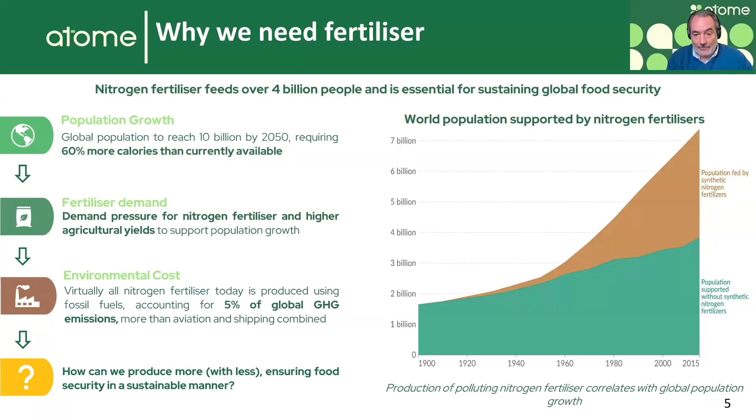The opportunity and impact of fertilizer means that if you can tackle the carbon footprint of fertilizer, you can take care of 50% of the carbon footprint of bread, 20% of barley, 20% of milk. If I look at this can of Pepsi, 5% of that can's carbon footprint is directly correlated to the use of fertilizer. So it's a super low-hanging fruit, extremely controllable.

But the problem is we need tons and tons, thousands of tons of fertilizer a year. The way to make green fertilizer and green calcium ammonium nitrate is by going to green ammonia. The only difference between green ammonia and regular ammonia is that the hydrogen used as the base molecule comes from renewable sources. The only way to do it at large scale is if you take a lot of baseload renewable power and put it into the existing processes, which is what we are doing.

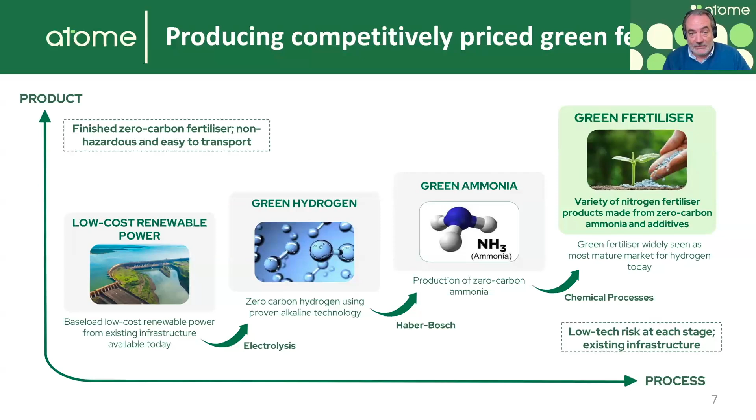In our first project, which is in Paraguay—why Paraguay? Because that's where you have the second largest hydroelectric dam in the world, and you're in the middle of the largest fertilizer import market. Think about Brazil, Paraguay, Argentina—the main breadbasket of the world today. And yet it imports 95% of its fertilizer from Russia, Saudi, and the US. So you can do decentralized fertilizer at scale with the right environment.

You'll hear later the great stories of others who can do things decentralized in a different technological way. Our view is we don't take technology risk—we take existing technologies, but we do them at a very large scale and develop them. Our first fertilizer is really about going calcium ammonium nitrate, displacing urea with specialty fertilizers.

Villeta is our first project, and I should say, we are a publicly listed company, traded on the London Stock Exchange. Because of that, a lot of what I say now is available in much more detail on our website at atomeplc.com, where you'll see a much longer presentation than here.

In this slide is basically our first project: 145 megawatts of power, which will feed a plant that will produce about 260,000 tons of calcium ammonium nitrate per year. We're talking about displacing every single year basically half a million tons of CO2 per year. So it's not nothing—it's not huge, but it's not nothing.

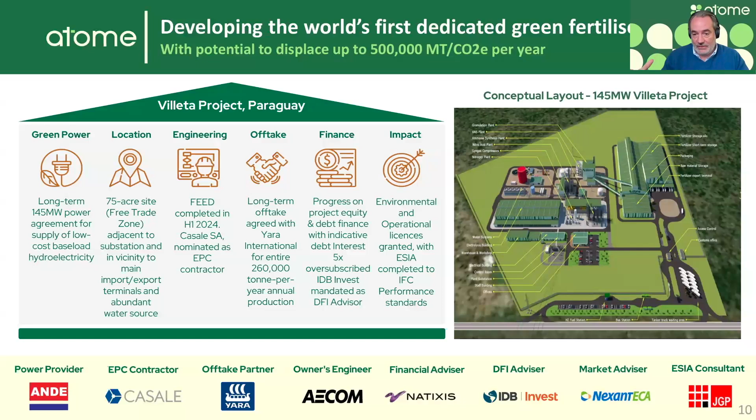So you need to manage communities, you need to manage the environments and so on. This gives you an idea of what it means: 145 megawatts of power, which will produce about 260,000 tons of fertilizer, displacing twice the amount of carbon.

According to our broker, for a publicly focused company, there's the potential to make about $110 million in year one of revenue, while giving a 90% reduction of regular synthetic fertilizers, at the same price as imported gray fertilizers. We want to get the green premium, but you need to be competing without the need of a green premium and without the need of a carbon premium.

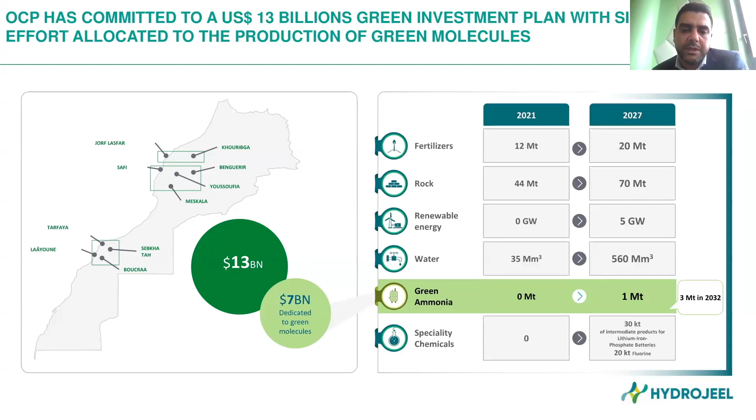Maybe on the next slide, a zoom on hydrogen, we can skip this one please. Our two main projects that we are contemplating today: a project of 100,000 tons per year of green ammonia directly located in the heart of the chemical operations of OCP, in Jorf Lasfar. This 100 kilotons will be 100% taken by OCP and will support the decarbonization of part of those operations, but it also serves as an industrial and development platform for the large-scale ambition of multiple million tons of green ammonia being developed in the south of Morocco.

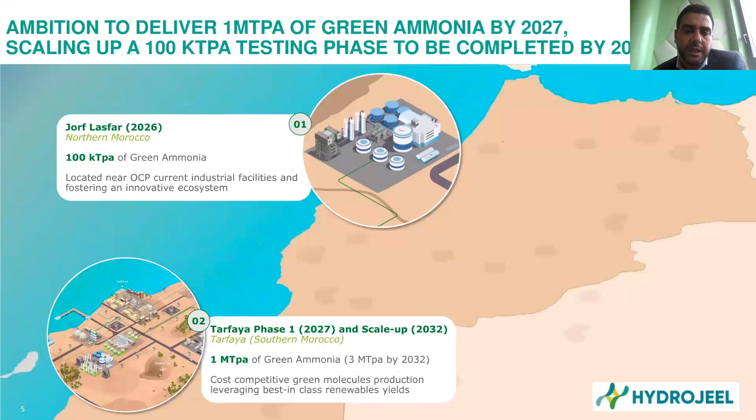On the next slide, there are more details about the projects. For Jorf, it's a project that will be 100% sourced from the grid, from new renewable projects coming online. It's really a cornerstone of our full strategy for developing green ammonia, because it helps test emerging technologies that are promising for scaling up operations. It also helps integrate hydrogen, ammonia, and the management of intermittency, and by design it's compliant with the stringent requirements for RFNBO certification for hydrogen.

It's uptaken by OCP, and the project financing is also supported by OCP, so that we can expedite the key learnings we want to leverage from this project.

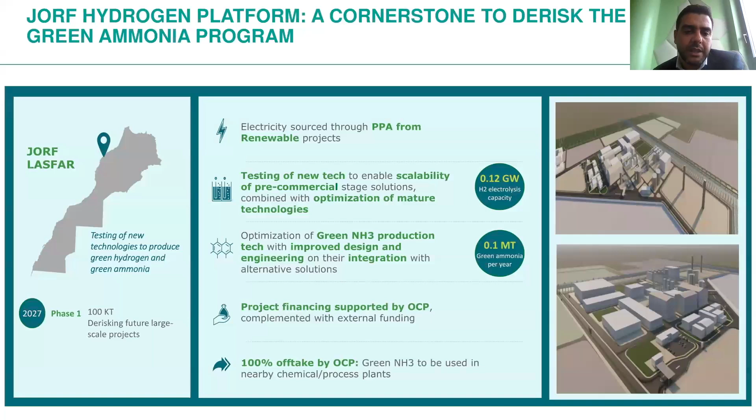The second project is down on the coastline in the south of Morocco, located in Tarfaya. These projects with multi-gigawatts of renewables require a large asset in terms of land. We have already secured 100,000 hectares to develop the renewable aspect of the project - for wind, we're talking about more than roughly 2.5 gigawatts of capacity, and we need also about 1 gigawatt of capacity of solar.

Managing intermittency still goes through the installation of batteries. The project is supposed to be commercial, serving OCP but also addressing other international market needs. Therefore it follows full diligence in terms of environmental impact, up to the standards to make this project bankable, where lenders can find a good balance of risk and reward on the project.

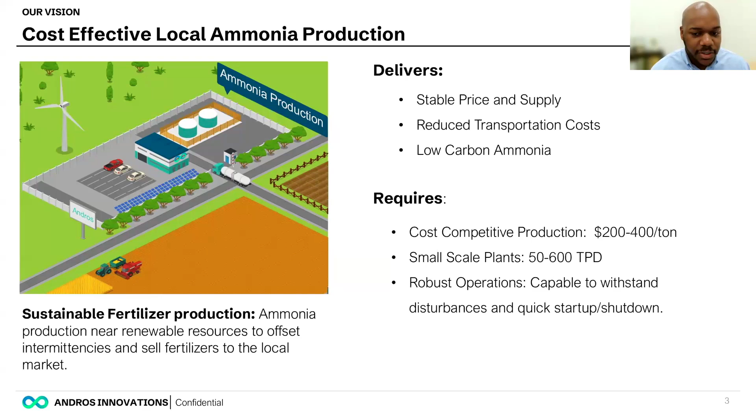And then you need a process that can withstand the quick starts and stops of these renewable power systems. So then we looked at the Haber-Bosch reactor, which is the main way of producing ammonia. And doing some research, we found out that there's a lot of difficulties with scaling down this process to make it economical. So we discovered ways to make ammonia a lot more competitive through a new process.

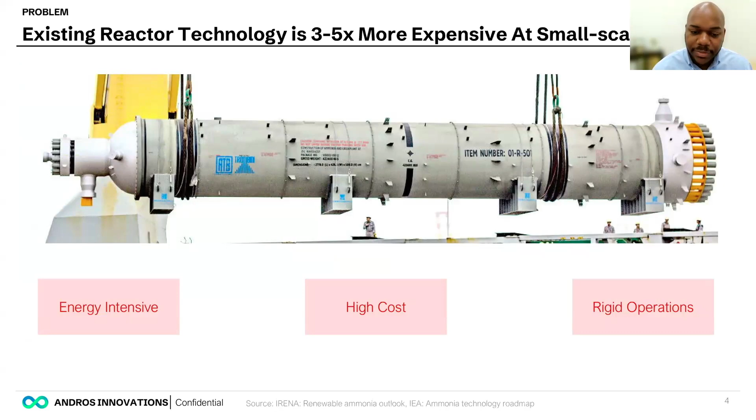What we found out was, first, if you can reduce the pressure of this reactor, you can make this more cost effective. That's not a new finding. Many people have been trying for a long time to make ammonia production a lower pressure process, mostly through the use of exotic catalysts. But what we're doing is starting from the ground up with a whole new process to make ammonia at atmospheric pressure and low temperature.

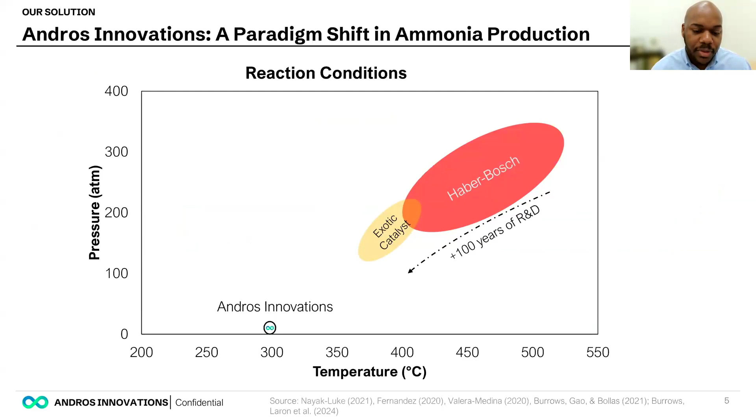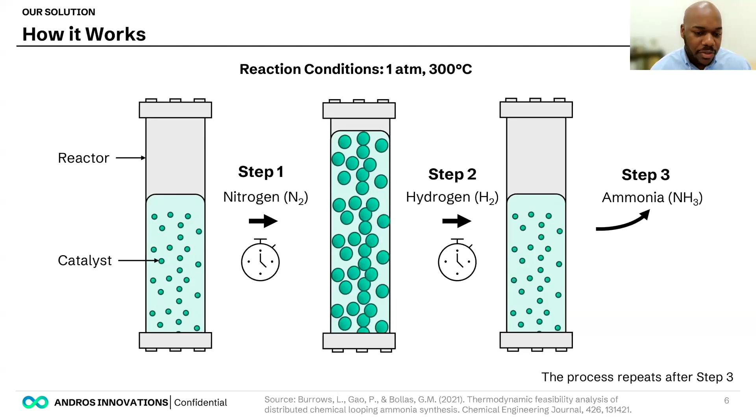The way this works is a cyclical process. It's a thermochemical process where we first react a material with nitrogen, fixing nitrogen onto that material, and then we react it with hydrogen in the next step. This is a cyclical process that repeats after we remove all the nitrogen. This produces ammonia at atmospheric pressure through a whole new set of chemistry.

The technoeconomics of doing a process like this at small scale and low pressure essentially means that you can reduce the capital and operating cost of ammonia production because you're not having to compress a lot of gases to make ammonia at high pressure. You reduce your energy demand quite a bit. This is a published study that is linked below if others want to look at it.

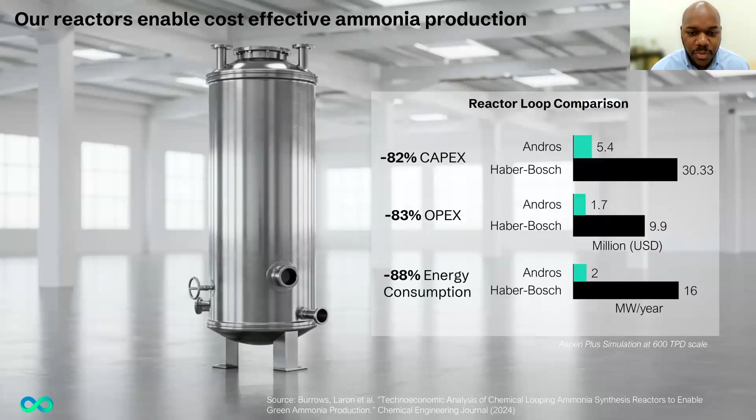What this also does is, because we're taking nitrogen and hydrogen from any source, we're trying to be the most effective way of converting nitrogen and hydrogen to ammonia, which allows us to be flexible to the changing landscape of hydrogen. So geological hydrogen, for example, becoming more competitive, or electrolyzer-based hydrogen, enables us to make ammonia and green ammonia from a variety of use cases.

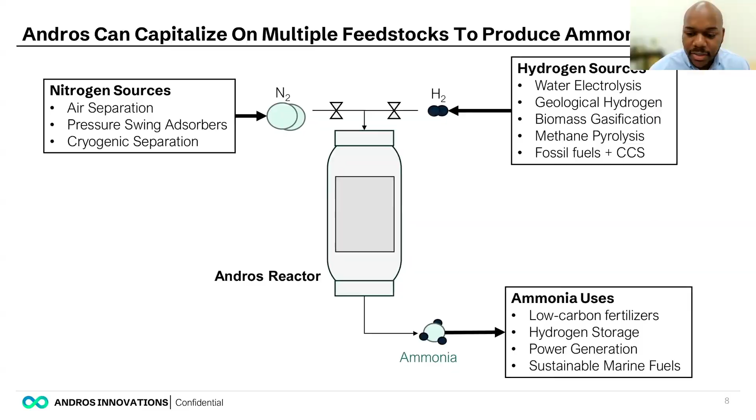To quickly wrap up, we've developed a new process that can produce ammonia at atmospheric pressure and low temperature. Before doing my PhD, I spent time operating power plants at scale, so I understand the rigor needed to deploy an industrial product, which is why we're in the lab doing a lot of long-term tests on our catalyst and material.

We're preparing to scale up this reactor and do a demonstration. These demonstrations will be out in the field where we can test this reactor for a long period of time and essentially connect a hydrogen source and a nitrogen source and start making ammonia for our industrial partners.

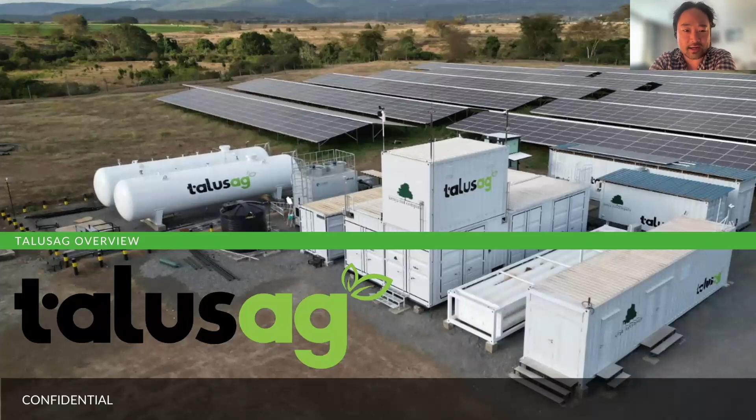The attraction, when we started looking at modular green ammonia, we really looked at it originally from a philanthropic basis. One of the largest issues with ammonia, in addition to it being carbon intensive, is both its availability and volatile price across geography. So if you look at farms in the developing world, a farmer in Africa, a farmer in South America, a farmer in inland Southeast Asia pays anywhere from 2 to 6x for fertilizer as a farmer in the United States. Our first green ammonia system, already deployed last year in Kenya, reduces the cost of fertilizer by 30 to 40% on an equivalent basis in many parts of the developing world.

I think what differentiates us is we are actually moving, actually deploying systems now. We deployed our first system last year. We just deployed our second system into the United States. We're deploying a system into the EU now.

That'll be online in March. And our larger system, which produces order of magnitude 7,000 tons of ammonia per year, our larger module, will come online in the next couple months here in the US.

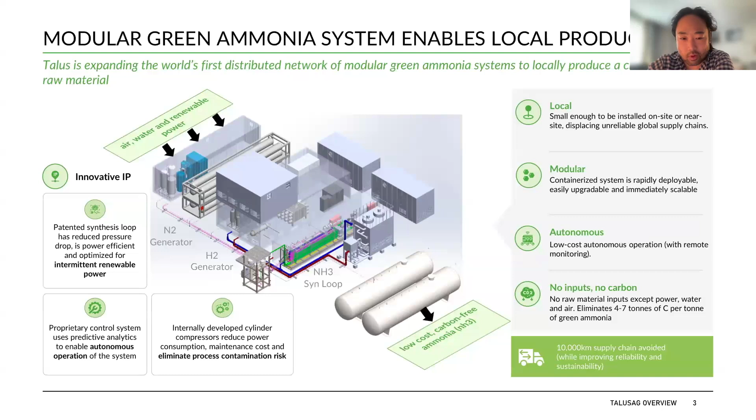Our average cost of power at our sites in the US is somewhere around $40 per megawatt-hour. Our average cost of power in the rest of the world, some are $20 per megawatt-hour and some are $50 per megawatt-hour. But I think with those costs, we can deliver a product that is anywhere from 20 to 40% cheaper than the competing fertilizer.

I think we've been spending most of our time focused on existing applications today. We also have an ammonia generator. We're working on a genset that will allow us to use the ammonia in addition to fertilizer for one of our on-site farms in Kenya.

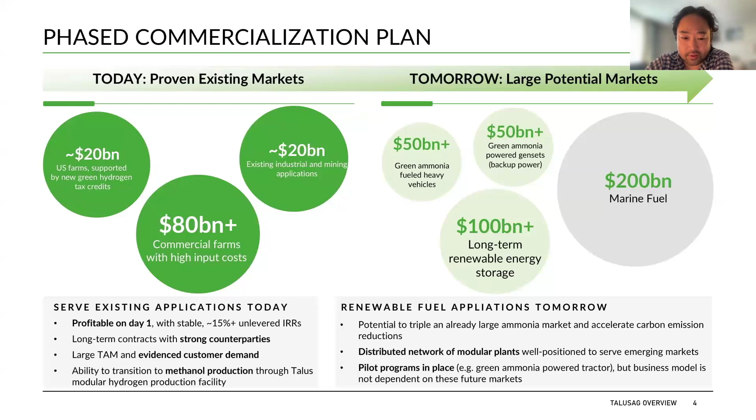We may replace their diesel generator with an ammonia genset that is cost competitive, or actually a little cheaper than the diesel that they import.

But I think what's really important to remember is, and I think I saw some of the questions for some of the other presenters on the Q&A, how can you be cost competitive? There are two ways to be cost competitive today, and maybe one more way in the future.

One way is, what we really started focusing on, markets where the cost of fertilizer is really expensive. A farmer in Kenya pays double for fertilizer compared to a farmer in the United States. A farmer in Uganda or Rwanda pays probably 4x what a farmer in the United States might pay. So we are cost competitive because the cost to deliver that import is expensive.

The other way we're cost competitive is we do get subsidies in some markets. And then the final way you can be cost competitive in the future is a bunch of these other technologies can focus on lowering the cost of production.

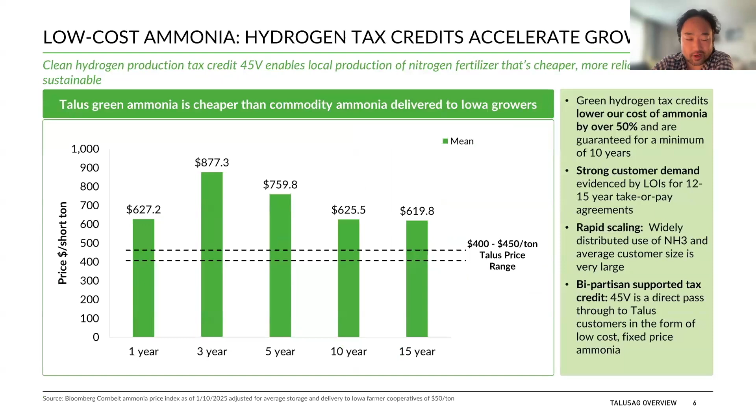In the United States, we get a large subsidy, so we're 30% cheaper than the long-term average of ammonia in the Corn Belt. And as a result of that, we have development projects across the world.

We have a couple billion dollars now in LOIs in the United States and offtake agreements. Our focus areas right now are in Southern Africa, the United States, a project in Brazil, a project in Chile, a project in Indonesia, and then some of those projects will deliver into Europe.

In the US, we have 78 sites that we have land control of and are advancing now. We expect to get to, by mid-2026, a point where we are delivering 3 of our larger systems per month, order of magnitude 20,000 tons of annual ammonia capacity per month. That actually starts to be a meaningful amount of ammonia for these regions.

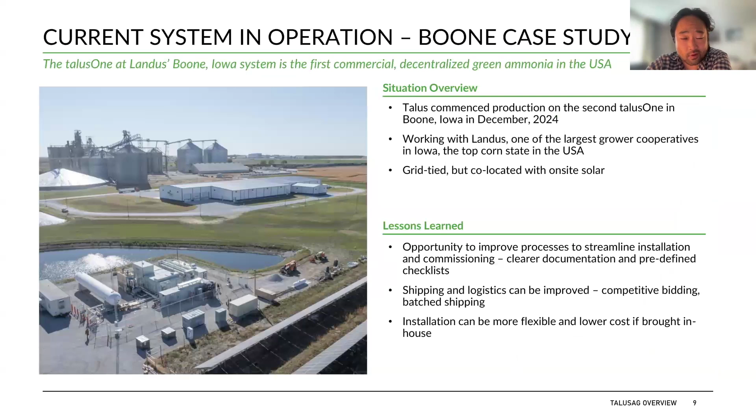Thank you. Yep, nope. So this is our project in Iowa, our first project in the US. It's online now. 30 miles up the road from that, there's a bigger project that's coming online in a couple months. Thanks.

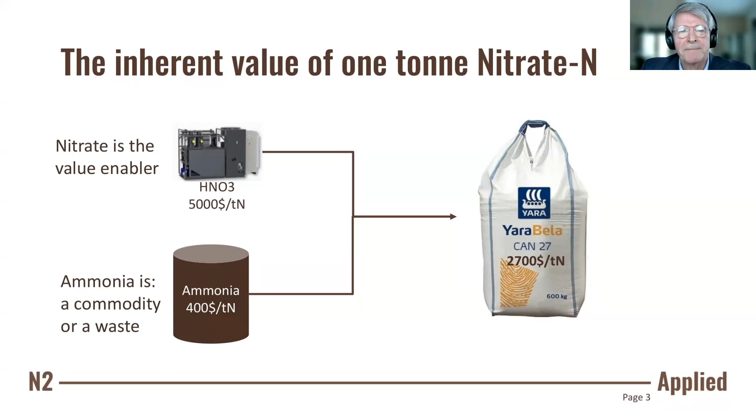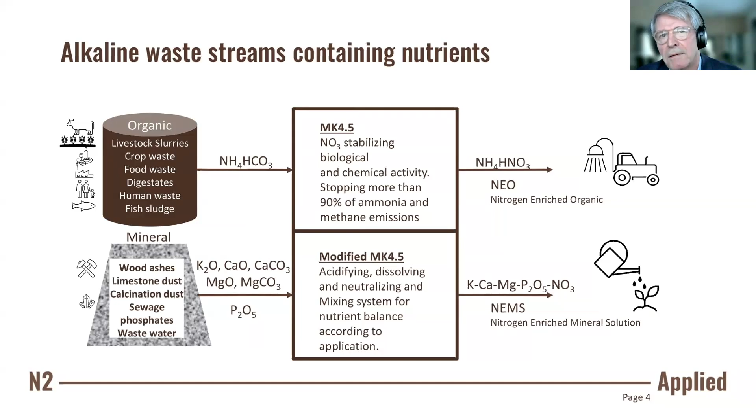Next, please. The world is full of nutrients that can be recycled on the farm, in the food chain, etc. And we see that if you have nitric acid, nitrates, or NOx gas, you can upgrade this to a fertilizer value that is higher and better than most other nitrogen fertilizers, and you get the benefit of all the other nutrients that are normally available in the waste. So typically we have organic waste, more than enough. We have mineral waste, more than enough. There is more than enough waste in the world that we can convert to nitrates to replace 100% of the Haber-Bosch. That will not be done, but the potential is there, just as a curiosity.

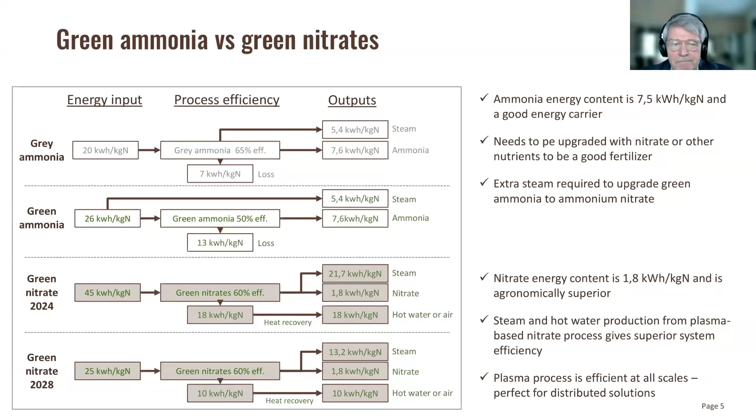Next, please. I'll just ask, Rune, we're starting to get short on time, so we'll give you 30 seconds to finish up. Thank you. Very good. That was the plan.

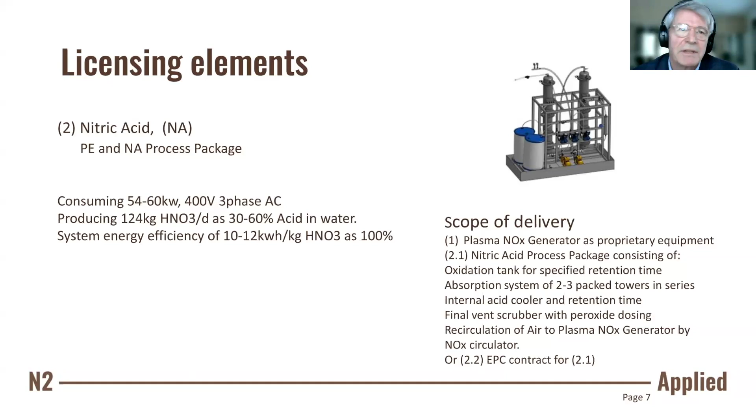We are a technology and licensing company. We need partners. We offer our technology to partners, and starting with the plasma generator, it can fit into several systems. As a licensing element, we can produce nitric acid. We are now running a pilot here just behind me, and we are already above 40% nitric acid. Maybe we need to go to 60, but not necessarily for the distributed local solutions. Next, please.

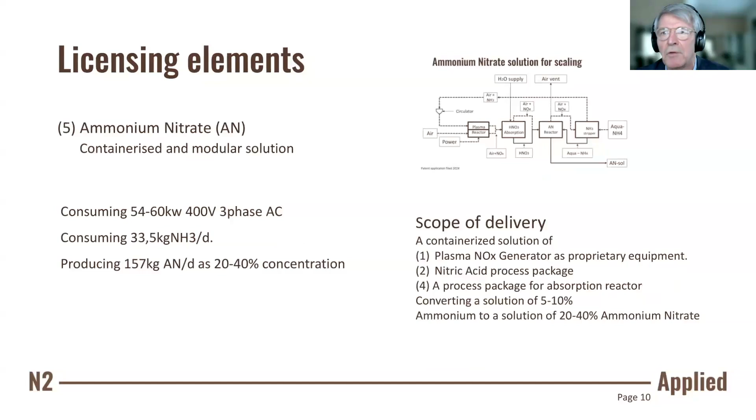We are also scaling up, and together with Yara, they are supporting us on process design and energy utilization. And we are now scaling up our technology and making it suitable for a broad spectrum of applications. Some of these applications would be ammonia water from ammonia scrubbing in industry. It would be all kinds of livestock slurries. It would be calcium oxides, minerals, etc.

And the plan is to end up in 2026 to build the first-of-a-kind calcium nitrate production. Calcium nitrate is one of the most interesting nitrate fertilizers. It's very much used for cash crops and high-value crops, used in greenhouses, etc. So we cannot compete head on against green ammonia, because green ammonia is not a fertilizer. It is something that you need to convert to something, except a few places in the US where they use it directly. But we compete on the distributed production in containerized solutions.

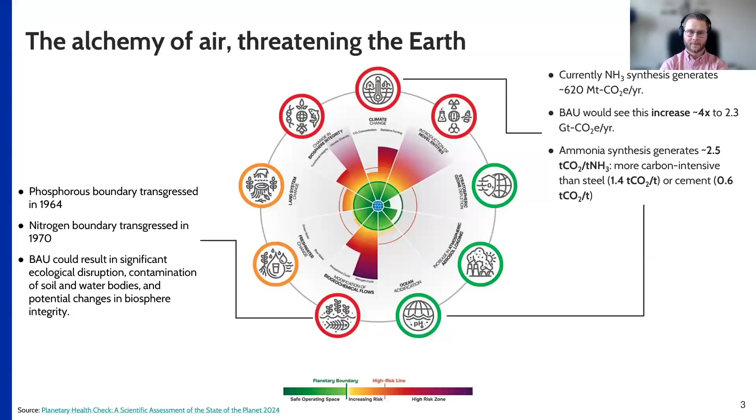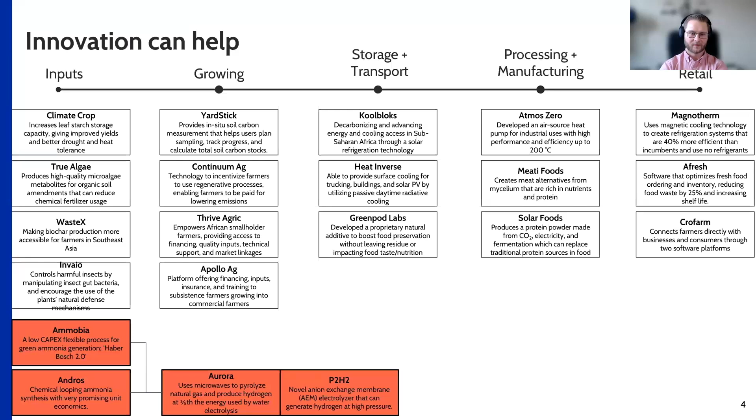Our primary focus at D3, oh, sorry, previous slide, please. Thank you. Is on the technological inputs. So today we'll highlight two great green ammonia companies. You just heard about Andros, but we'll also talk about Ammobia, another low capex flexible process. And we've also supported a number of hydrogen innovations at Third Derivative. Two in particular are Aurora Hydrogen and Power to Hydrogen. They produce low carbon turquoise and green hydrogen respectively, which help reduce the emissions of hydrogen production and enable low carbon ammonia production. Next slide, please.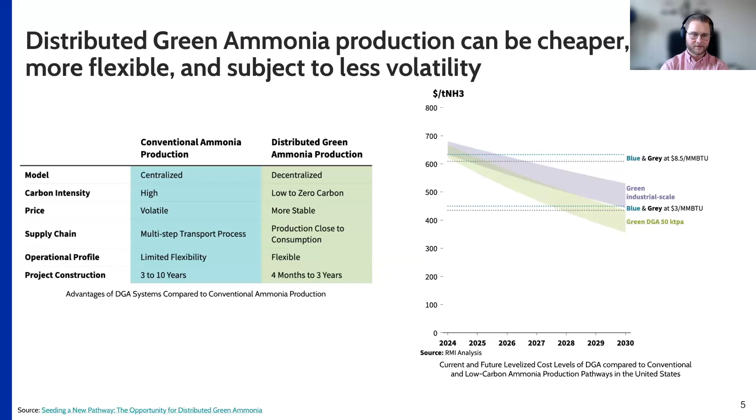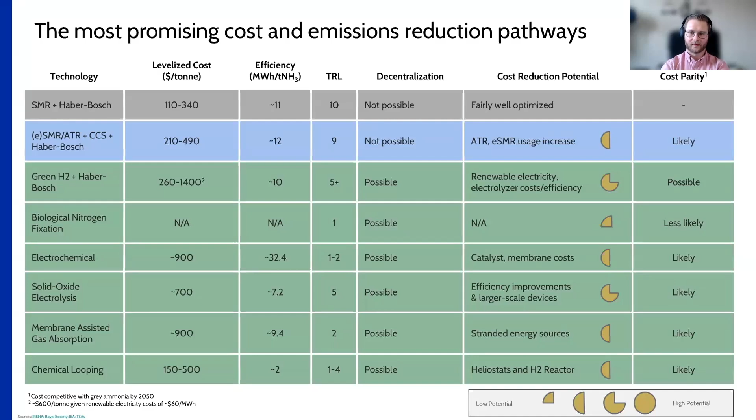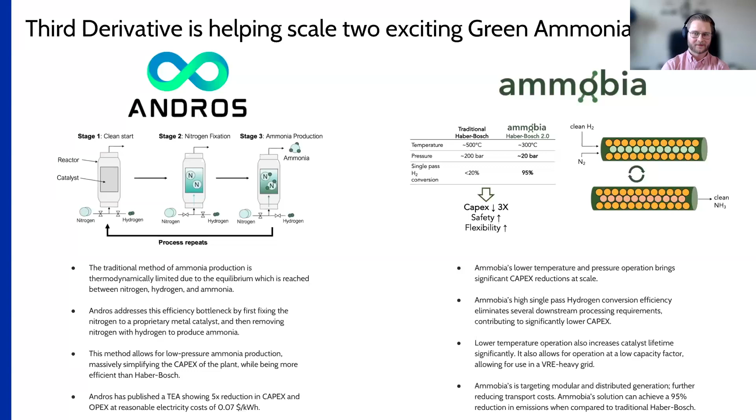So as I mentioned, Third Derivative is helping to scale two startups. You heard about Andros. Ammobia is another low capex startup doing a Haber-Bosch 2.0 process. The whole selling point is reducing the amount of back-end infrastructure that's traditionally needed in Haber-Bosch by working at lower temperatures and pressures. Next slide, please.

We really think that this is an exciting time to be in the ammonia space. Others have talked about this, so we won't belabor it, but we expect traditional ammonia usage in fertilizers and other uses to expand. And we expect to see the addition of additional sectors in shipping, as a hydrogen carrier, as a power generation asset, to come into play by 2050. And these uses will scale with renewables, which will allow for the large scale production of green ammonia, we believe.

And there's also the productivity imperative. Most population growth is going to happen in African and Asian countries. And these countries have the lowest productivity yields to date, making it very imperative to develop solutions to help them grow their populations and feed populations sustainably.

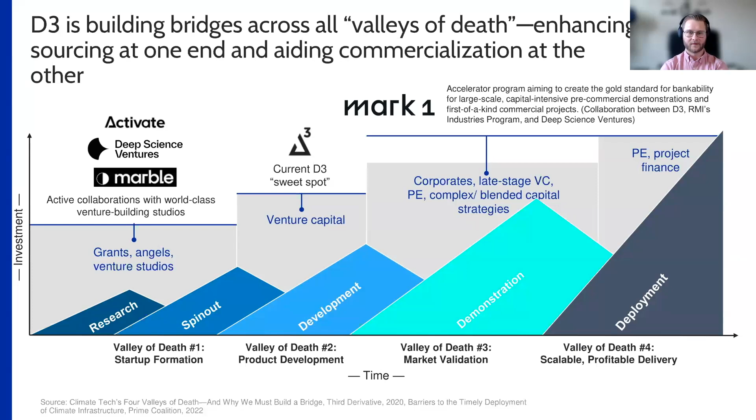Next slide, please. At Third Derivative, we try to help startups by bridging the so-called valleys of death. Our current sweet spot is valley of death number 2 that sort of spans between startup spin-out to the product development stage. So that's like TRL6, startups looking for a pilot. We've also recently started to branch out and develop collaborations with a number of venture builders, Activate, Deep Science Ventures, Marble, and have also developed a project finance accelerator for later stage innovations in Mark 1, along with Deep Science Ventures and RMI's Industries Program. Next slide.